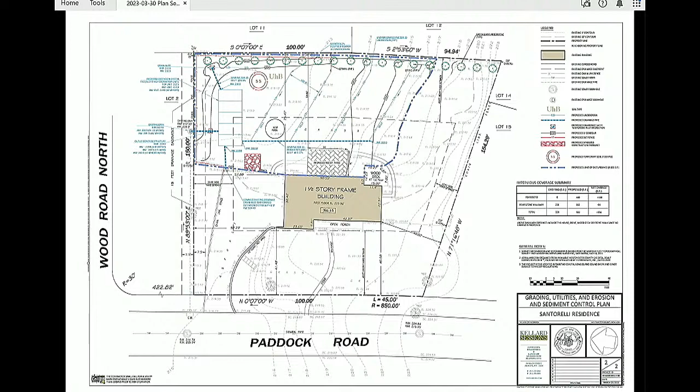Now, the grading—how much of a regrading are you doing? How much of a slope was there before? It's a gradual slope from right to left across the rear of the property. There's somewhat of a plateau on the far right side, the south side of the property, and then there's a gradual drop in grade from right to left across the rear.

We are proposing to strip the topsoil about 6 inches, bring in about 1 foot of bank run material, a nice well-drained soil, and then put the topsoil back. So at the end of the day, the total increase would be about 1 foot from what you see today.

And you think that'll address the issue with the water settling in that area? Yeah, as I said, the underlying soils are just poor. We did some deep tests out there just to see what was going on. The groundwater level's somewhat high, which is why we're using concrete tanks. We can't infiltrate, dry wells won't work in that portion of the property. They may on the higher elevations, but that doesn't help us with what we're trying to do here. So we have a series of tanks to collect and detain that water, and then slowly release it back into the village's system.

Sarah, are there any planning issues relating to this application? No, all of our previous comments have been addressed. Okay, so it's sufficient screening? Yes, the arborvitae will provide sufficient screening.

And Mike, as far as stormwater management is concerned, you're satisfied that their proposal will address the drainage issues that they have? Well, remember that this is to handle not necessarily runoff, but soil conditions that are there now. So they're trying to mitigate what's happening in there due to the runoff from the soil.

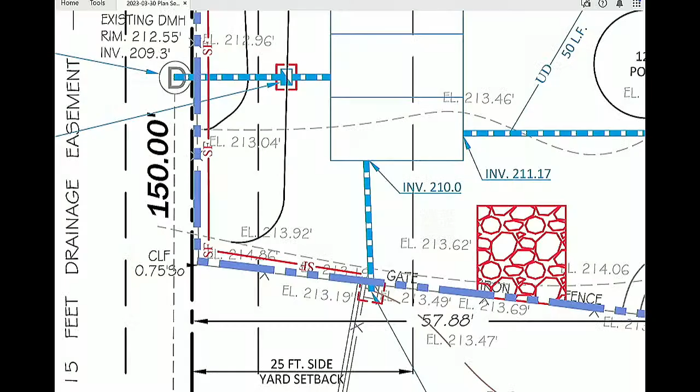That existing storm line that runs along the property line has a manhole—probably, I would say it's in the middle, let me see if I can show you. So if you can see that connection there to the left, that circle with the D in it, that is the village's storm manhole that sits on that existing line we're connecting to.

That manhole actually has an open grate, so stormwater runoff is getting into that manhole today. We're simply trying to collect it before it gets there and hold it back for a period of time so that we're not impacting the village's system. Are the tanks you refer to Cultec units?

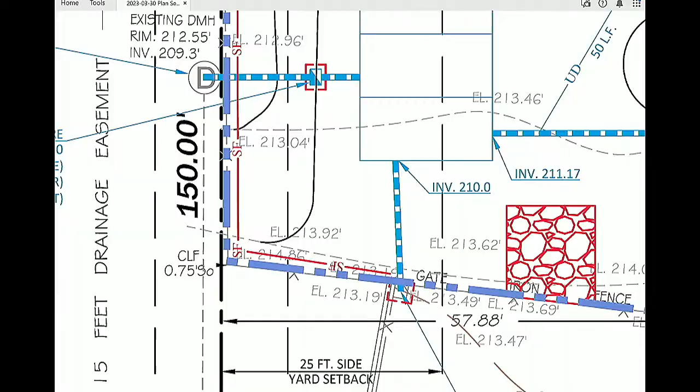They're not infiltrators - the soil conditions here aren't suitable for infiltration, so these are actually precast concrete tanks, buried underground. The single pipe coming out is sized to restrict the flows, and that's all been modeled to demonstrate that.

What's the material of the tanks? They're concrete, about 2 feet high and roughly 5 by 7, and they're all interconnected so they act as one unit. We don't have to worry about them floating when empty - between storms with higher groundwater elevation, you don't want the risk of buoyancy causing something to pop out of the ground.

Board members, are there any questions for the applicant? One question I have - I know we're raising the grade on the right-hand side of this map, the lots next door and behind. Since we're going up, is that going to affect their drainage onto you, or them at all?

The property to the far right, to the south, we're not doing any regrading there at all, so the runoff from that property today will continue to do so. The property to our north is roughly at the same elevation today, and we've graded so that we'll meet the existing grades of our property before it reaches the fence line, so we won't impact them either.

For the property to the rear, we are creating an earth berm along the rear property line, but as you approach the low point near the corner, we've adjusted the grades to match existing grade again. So any runoff from that house - I believe they have a couple of roof leaders that discharge at grade - will still be permitted to run towards the property line and ultimately into the village's storm manhole. We won't be impacting any of the neighbors.

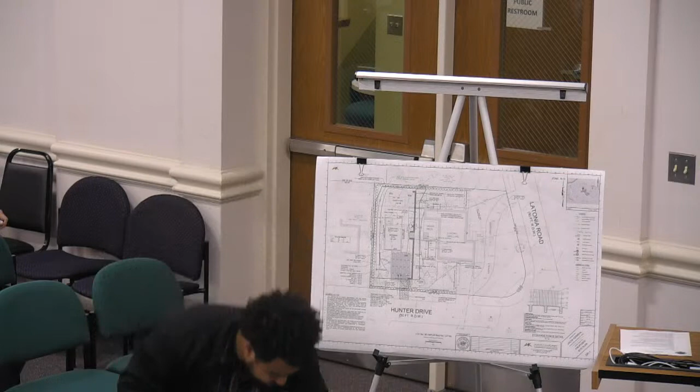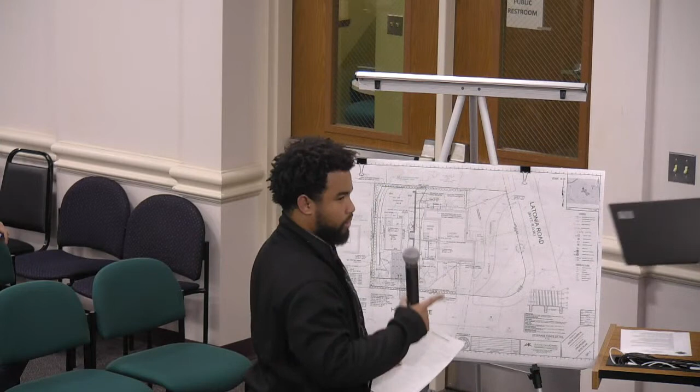Do you hear me better? Whoa, much. Oh, hello? That's okay. Better, speak up, we good? Look, okay, that's good.

So like I was saying, we have a swimming pool in the back. We have the wood patio over here as well. And then we have a modified existing deck that's there. All right, perfect, okay.

Thank you, sir. Thank you so much.

Okay. So, in order to deal with the drainage on this site, we have designed our drainage system in accordance with the Rye Brook Village Code with the total volume storage stormwater management system. It's consisting of 19 Cultec units, which you'll see to the south side of the swimming pool, in this area over here. These are 330 XL units, 2.5 feet in height, that collect all the proposed and existing impervious areas on the current site.

So the system captures the runoff of all the impervious surfaces and contains it within the site up to the 25-year storm for total volume storage purposes. But for runoff and discharge, it withholds all of that amount until the 100-year storm.

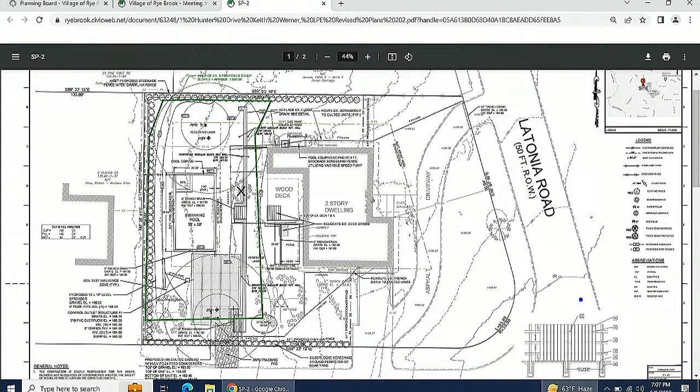Is that something we should maybe get determined before we complete the application, what the building inspectors say, because then the considerations are a bit different. If they have to put in another fence, then we have to deal with how that fence is going to work. I suppose the chain link that you're installing up to the stockade would then just continue.

We have no problem with that. It's a 6-foot fence there. We have no problem adding a chain link fence all around the property. The question is whether they have to do that.

Well, there's options here. Either they do a fence around the entire property, or they could do a fence around the pool. So there's a few different options of what they could do. If they're going to have to add an independent fence, then clearly it's going to have to move back 5-10 feet inward. But that's up to the building inspector. That's his jurisdiction.

We have no problem adding a fence around the property. That we have no problem with. Correct, but based on his determination, it may have to be a solely independent fence, not connected with the existing fence that's there, because if you don't have ownership of that fence on the property, and the neighbor decides to remove it, now you're in violation of the state code, not having a fence around your pool. So that needs to be clarified with the building inspector.

That's not a problem. We have no problem installing a chain link fence all around the property. Again, the existing properties we're talking about, there are pools there as well, so I assume the fence will be there for a long time unless the pool is dumped or closed.

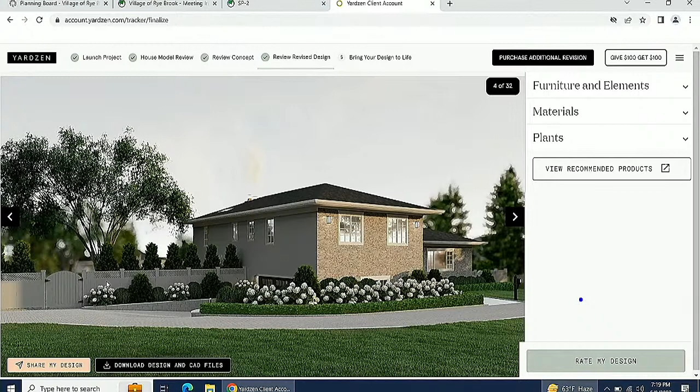Do you mind coming on up? Just gonna share a quick overview, scroll fast just to give an idea. So this is what we're talking about here, the stockade fence with the gate on both sides of the house. Just gonna show you the trees.

So the fence will be behind those trees. These are the trees that will be planted, privacy trees. We will start with 6 to 8 feet and they will grow quite fast. Are they right on the curb? They're not on the curb, no. All trees and planting have to be on your property, not within the right of way, so whatever that 6 feet is, that's how they have it shown.

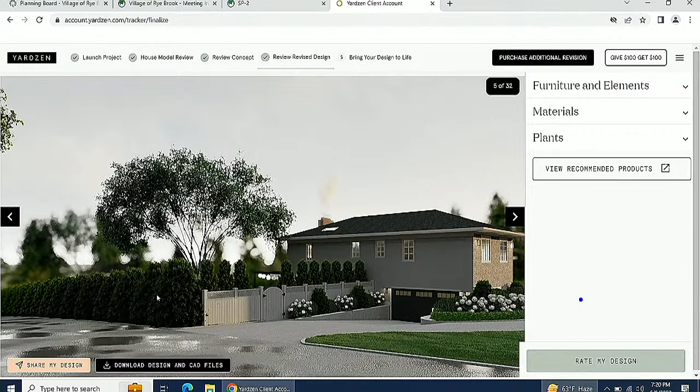No, your right of way is probably 12 feet if not more, whatever your property line is, you've got to be in from that, whatever that setback is. This shows you this is what I wanted to show, the inside, and on the outside there'll be those tall trees, the privacy trees. The chain link will be in between, and on our side we plant shrubs just to cover that from our side, so the street side will not see the fence.

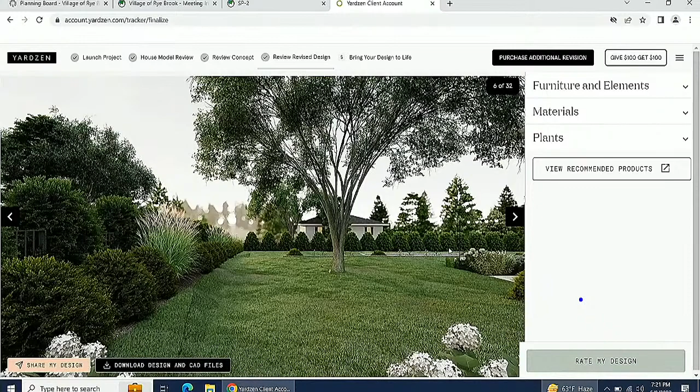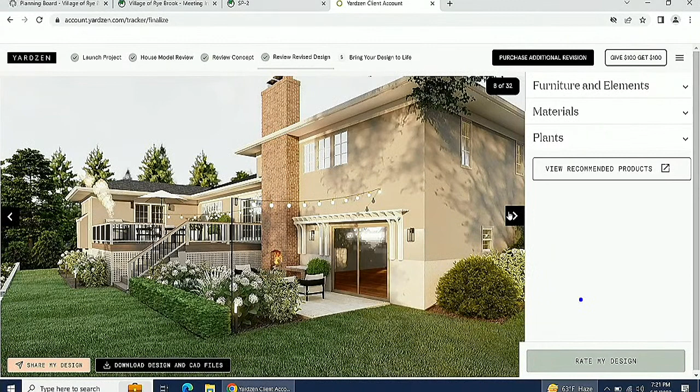They'll just see the privacy trees, and that setback will be whatever the rules and regs require. This is exactly what I wanted to show, the same thing, this is the back side, this is with my neighbors. So just to show you, this is where the patio will be, all the other stuff is already existing. This is the deck and this... Are you able to email these to us?

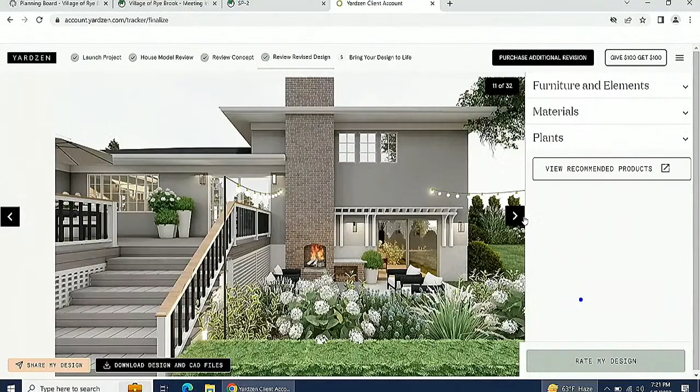We can do that, that way we have them uploaded for the public to see. Yeah, so all those, this is how, and this is where this will be, the retaining wall.

Showing from our property on Barbara Elias... why don't you come up to the microphone? Okay, they have to get you on the record here, this is streaming video, you know. We're serious about this. I'm Barbara Elias, and we own property right below the property that Jacobs has. There were a couple of concerns in terms of the fence continuing from the back of our property, which was hard for me to see, so I would like to see that, and also the retaining wall, where that would be in terms of our property, we can also see their property from our kitchen, not from... we also have a pool below.

So there were two concerns. One, the aesthetics of where the tree plantings would be and the fence. And the other is the drain - if there were any possible problems with the water coming down the slope, because it's a big slope on Hunter, and we're the next house down, so any water would be coming down. I would just like to hear about if there are any possible problems with that.

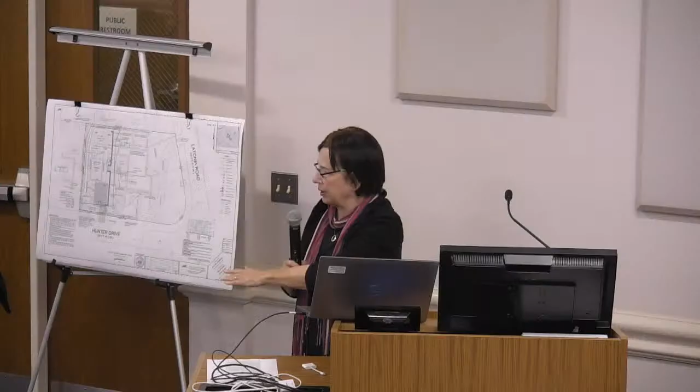Jake, do you have any photos of the way the landscaping would be from the bottom of your property near our fence? I'll see what I have, I'll try to share, because I couldn't really make out from the picture where things were.

So this is the retaining wall that you had a question about. This will be far from the property. It's near the deck - see where here right now there is an existing dead tree, the tree right there, and this is the retaining wall. It's gonna be, there's gonna be planting along the retaining wall as well.

So that looks really nice. Yeah, that looks - you know, we don't wanna see - well, we're not doing all that and we don't wanna see the retaining wall. Right, so we're gonna put trees, definitely.

And this is what you will see, because I know exactly where you're talking about, your deck near the kitchen. I know this will be what you're facing - this is what you will be facing. A cement wall? No, it's not gonna be a wall down by your property, it's gonna be this retaining wall.

That looks lovely, now I see it. So this is the pool, and with the fence and the screening, you're not gonna see all this, because there's gonna be the chain, the fence, and there's gonna be the privacy tree. So you're probably not gonna see the pool, but you'll see this area, the deck, and probably some of that. Yeah, that looks very nice. And so this is the privacy trees along your property.

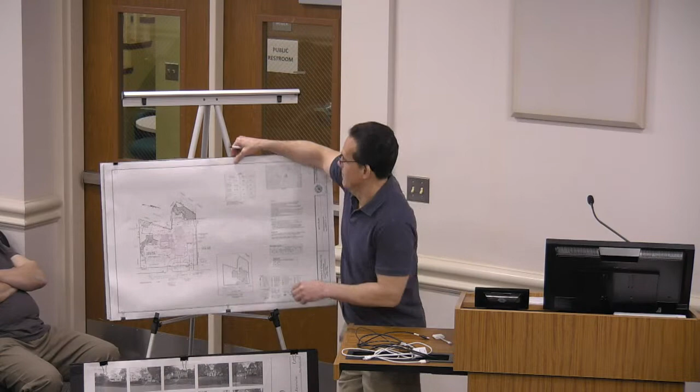Would you be able to show us where the cabana is now? There we go. Nice, if I got it right side up. Thank you, Abigail.

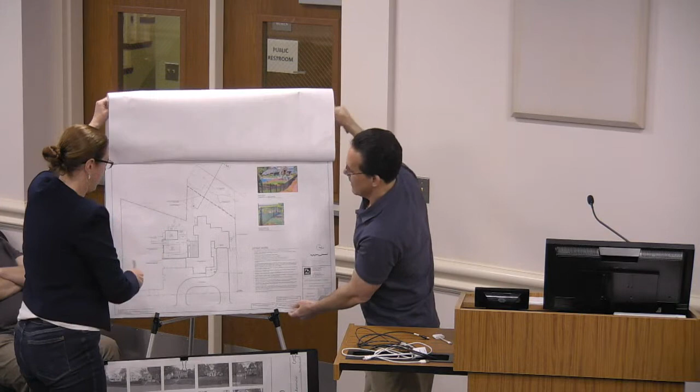Previously it was in this section, within the setbacks, but it's now moved to the rear of the property. It is centered on the pool, and it also serves as a nice buffer to the rear property. It will completely screen any activity in the pool.

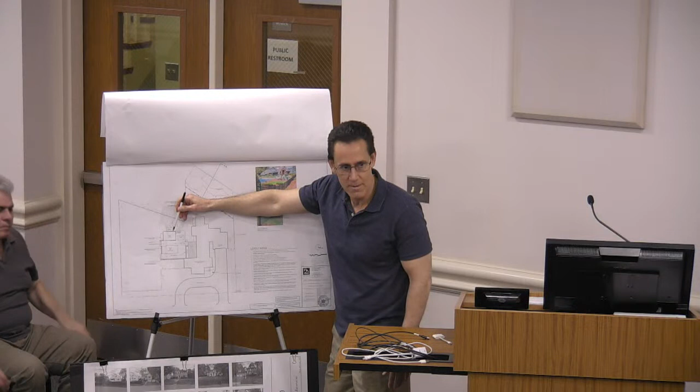As we mentioned last time, I'll recap: it is not a typical shed. It will be designed and constructed with the same materials as the house, finished in HardiePlank and board and batten, with the same quality of materials as the house. So it will fit in very nicely back there and serve multiple purposes.

Does that answer your question, sir? Yep. Any questions from the board?

The foliage, the green on the Ridge Street portion of the property, is that all going to stay? Is it going to be replaced? How is that going to be handled? Excellent question. It will all stay.

It will all be preserved with one exception. There is a very large, very mature tree, I believe 40 inches DBH, that is in very bad condition. In fact, it's a hazard, with a huge hole in the middle of it. I'm not an arborist, I'm an engineer, but I looked at it and said this needs to come down.

It's not in my way, but when I'm going to develop and spend a big investment on landscaping, I want to remove anything that is questionable, leaning, or unhealthy. That's the only tree I believe is coming out of that rear section. Where is that located?

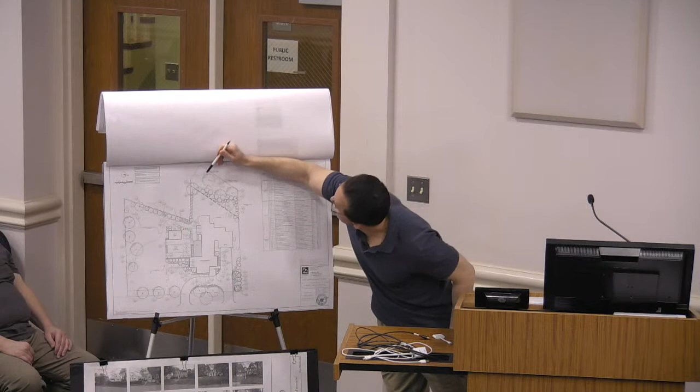Right there. No, I'm sorry, this is it. Actually, that's a different one. Why don't I go back to the tree removal plan, that would make it easier. Here's an 18-inch, here's the 40-inch. So that's in the scenic road overlay district.

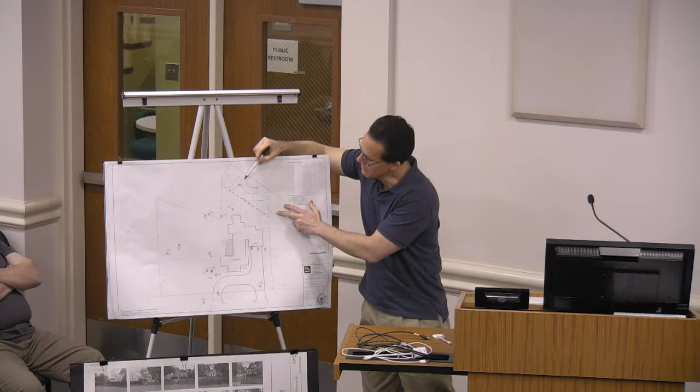In fact, on this we've added the SROD buffer line. This is a 35-foot preservation buffer, and the goal is to not touch anything in this area other than that hazardous tree. In fact, we're going to enhance this area with additional landscaping.

Sarah, if they remove that tree, what do the regulations provide? They need to put in a replacement tree somewhere? It requires three trees. That's a big hitter. Where are they going to be located?

We are adding back 20 trees in total, if you look at the spreadsheet for everything that is regulated. So we are actually replacing a total of 20 trees, and I think I have this memorized by now.

One of them is in the village right-of-way, so that will be replaced there. The others are within the property, so will be placed back on the property. These are new trees, scattered within here. We have quite a few in the SROD, and at least one here.

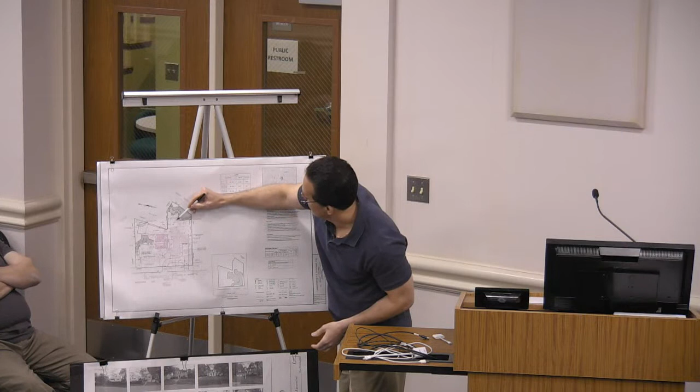Let's see, I saw the location of the generator, but I wasn't sure about the propane tank. So the generator is here, the propane tank is right here. Okay.

Back to the microphone. Because I'm very early in the design phase, and I'm going to spend a lot of time on this personally just because of my background, I did already meet with pool contractors, and as a gentleman said prior to us, we're going to go with an IntelliFlo VSF variable speed and flow pump. So that is definitely going to be done, we will notate it on the plan. And in terms of the generator, I'm going to go with a Generac Guardian Series home standby generator.

I've already reviewed the specs, they are well within the code allowance in terms of decibels. What I don't have at this moment is, because I haven't gotten far enough to design the energy requirements and power requirements for the home - we've got to get into that - but I could tell you that within this series of Generac products, it's one of the most commonly used that meets the requirements for sound ratings as well as runtime.

It's not going to be run other than brief test cycles that are pre-programmed, and the goal is, if all goes well, to never have to use it. It's really just there for an emergency backup. Does that answer your questions on that?

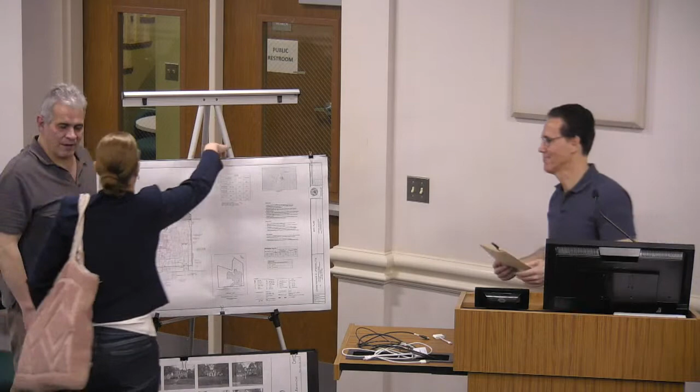Thank you very much, I very much appreciate it. And I'm looking forward to moving into Rye Brook, it'll be interesting to see what develops there, really will. Yes, thank you, have a good evening. Thank you, have a good evening. Okay.

Let me see, what's our last agenda item? 52 Bonwit. 52 Bonwit, okay. Okay, 52 Bonwit Road.

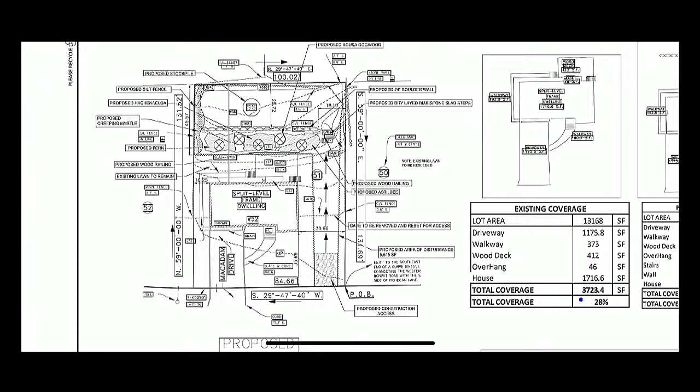Last time we were in front of the board, there were some concerns, I believe mostly associated with the stormwater runoff and how this regrading would affect the property to the rear of us. Following notifications, the neighbor behind at the rear property line did reach out to me directly and ask questions about the project. As a result, we agreed to add some additional plantings on the rear property line. It's not reflected on this PDF, but it is on this hard copy because it was a late change made since we had a discussion recently.

In addition, I did run some calculations just to show that there is in fact a reduction in runoff. I created, using HydroCAD, a hydraulic model for a 25-year storm, 50-year storm, and a 100-year storm. I'll show you two of the results, and then you'll understand the point.

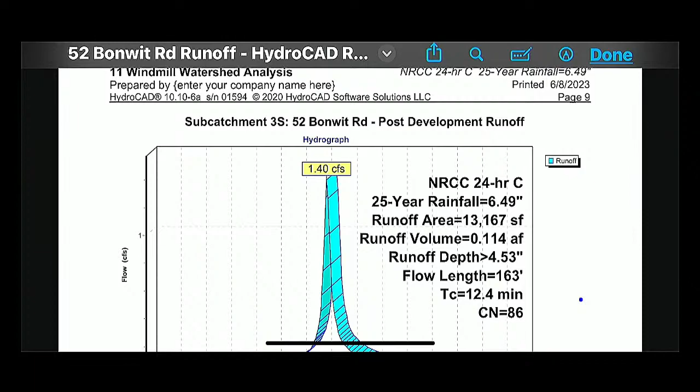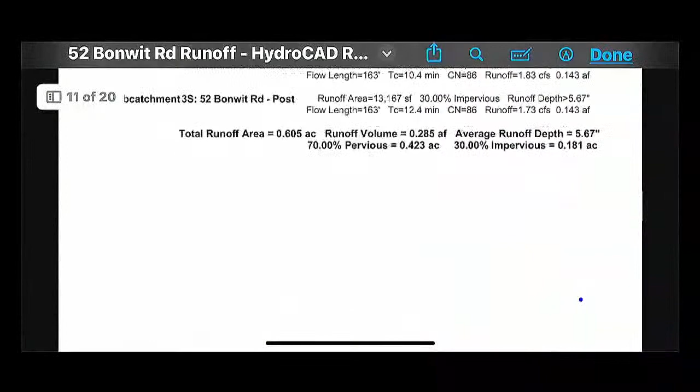Pre-development runoff to the rear property line, as is right now, is 1.48 cubic feet per second in a 25-year rainfall. Post-construction, it will be 1.40 — about a 5% reduction from the property itself. I wanted to come here showing you that it is actually a reduction, 5.4% to be exact, and that carries across every storm, whether it's a 50-year, 100-year, or 25-year storm.

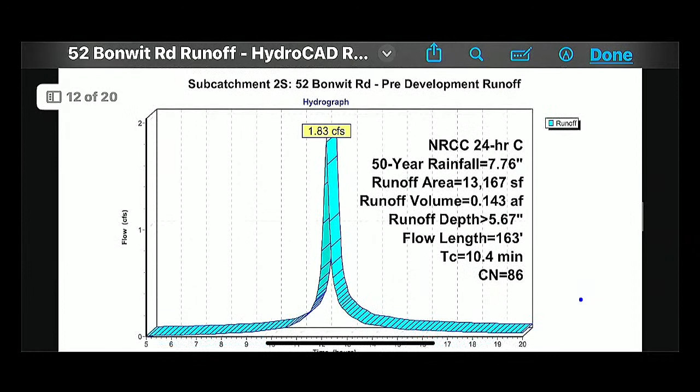This is a 50-year rainfall, which is 7.76 inches of rain within a 24-hour period. Pre-development, you would get approximately 1.83 cubic feet per second to the rear property line, and post you get 1.73 — again a 5.4% reduction. I just wanted to show you those numbers, that we actually ran them so you could see it is in fact a reduction.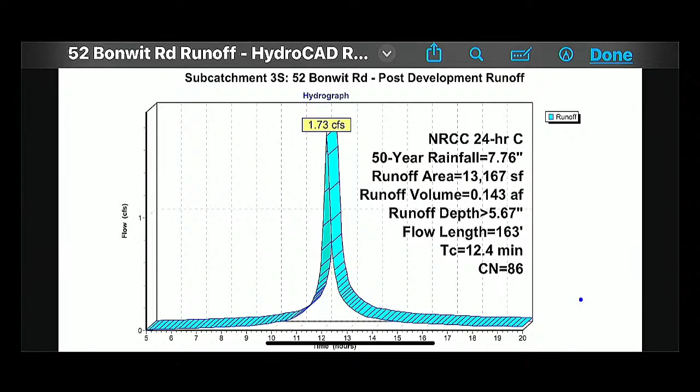Other than that, I believe we did have some comments from Sarah regarding the plants. There were two types of plantings that were not native and invasive, so we did make that change — it's on the hard copy. Did you discuss what plants are going to be substituted in for the plants proposed? I just asked that they be switched out for native. So which two did you put in? We actually do have a landscape architect on the project who helped with the design, so I'm going to let him speak on the plants.

Hi, my name's David Delardi, owner of Nature View Design Group, a licensed New York State landscape architect. There was a question about some of the ground cover we were putting in — it was some myrtle, and apparently that's more invasive. So we decided to go with Solomon's seal, a native plant species with good runners, good for soil retention, especially since it's located on part of the slope of the property where there's a lot of drainage going through. We used that as a supplement, and then the other change was we put in little blue stem as opposed to Hakonechloa. They're both grasses, but Hakonechloa is not native, so we used a native called little blue stem.